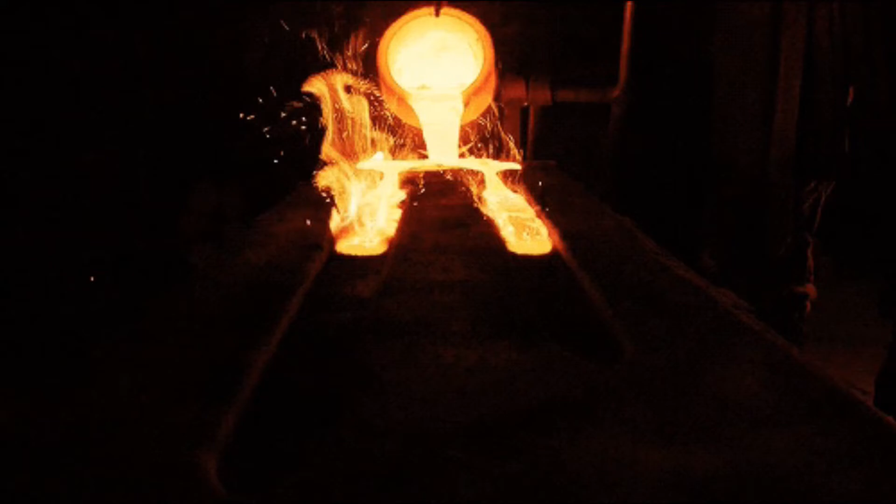Hello friends, in this video lecture we will discuss fusible plug. It is one of the mountings of the boiler.

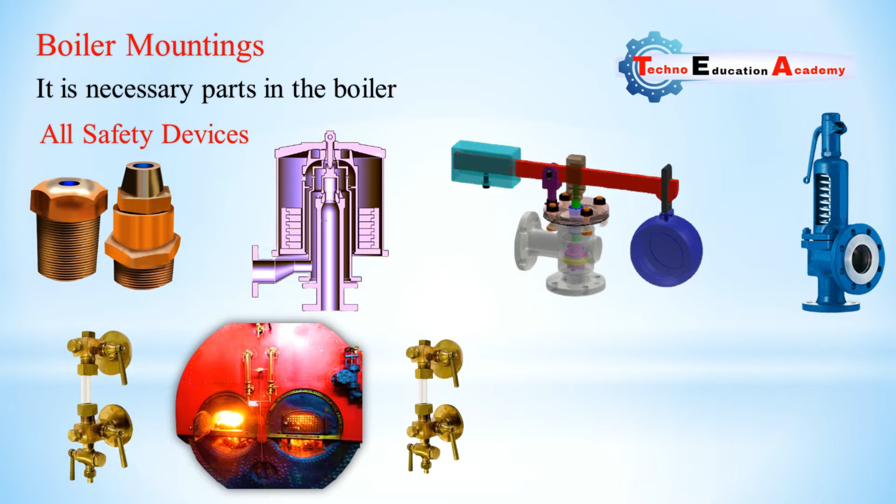First of all, what is mountings? Mountings means it is a necessary part in the boiler. Without this part we cannot operate the boiler. So various types of safety devices are attached with the boiler for safety purpose, like fusible plug, various types of safety valves, water level indicator, pressure gauge, etc. These are the mountings which are attached with the boiler for the safety purpose.

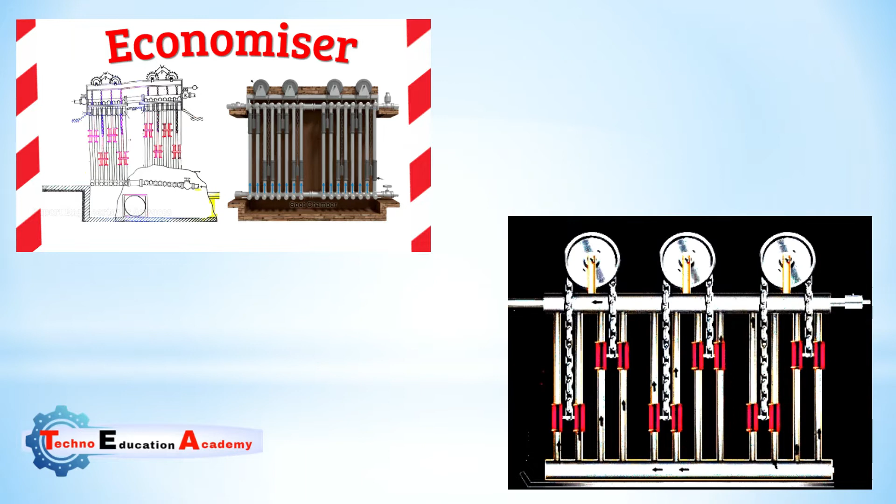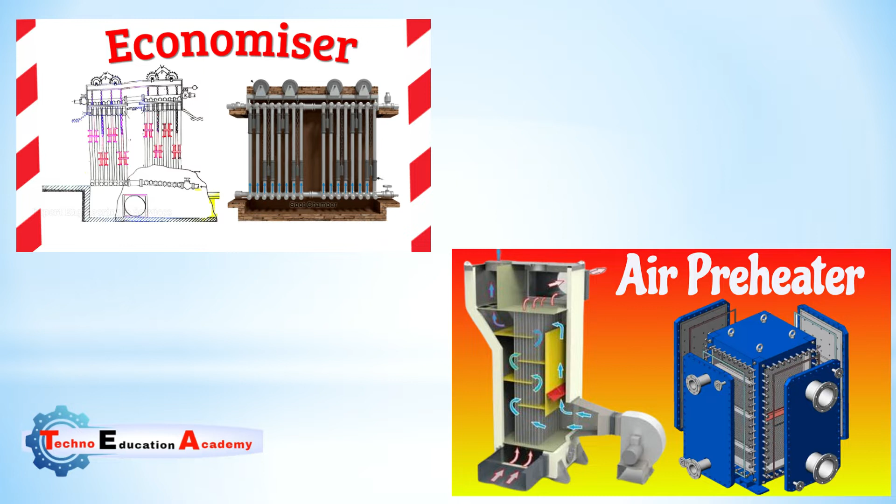Accessories means those parts in the boiler which are not compulsory, but whenever we use them, we can increase the efficiency of the boiler. In previous lecture we have already discussed economizer and air preheater, which are accessories in the boiler. They are not necessary parts, but whenever we use them, we can increase the performance of the boiler. So mounting means necessary part in the boiler, and accessories means parts that are not necessary, but whenever we use them, we can increase the performance of the boiler.

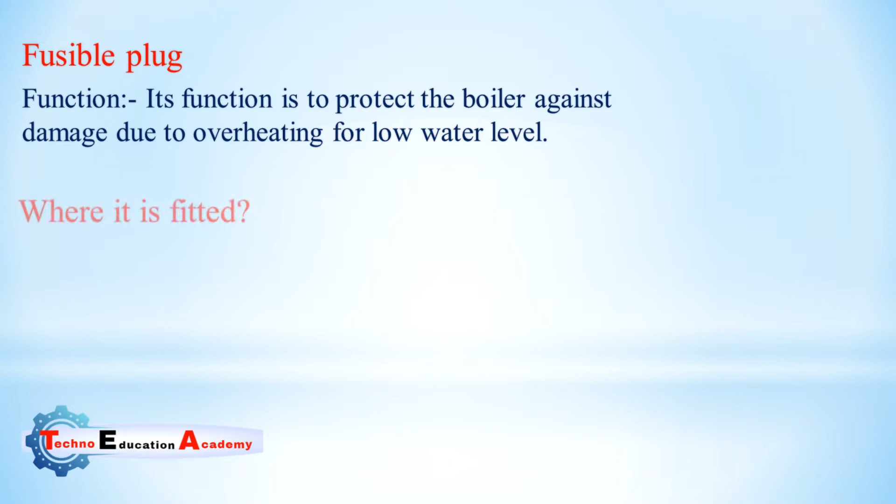So first of all, we will discuss the function of fusible plug, where it is fitted in the boiler. Then we will discuss the construction and working of the fusible plug.

The function of the fusible plug is to protect the boiler against damage due to overheating for low water level. Whenever a sufficient level of water is not there in the boiler, and we continuously supply heat, this heat is supplied to the empty tube. Due to this heating it might be possible the tubes crack or get damaged. So for that purpose we use the fusible plug in the boiler for safety purpose. It is fitted in the crown plate of the furnace or firebox at an appropriate place.

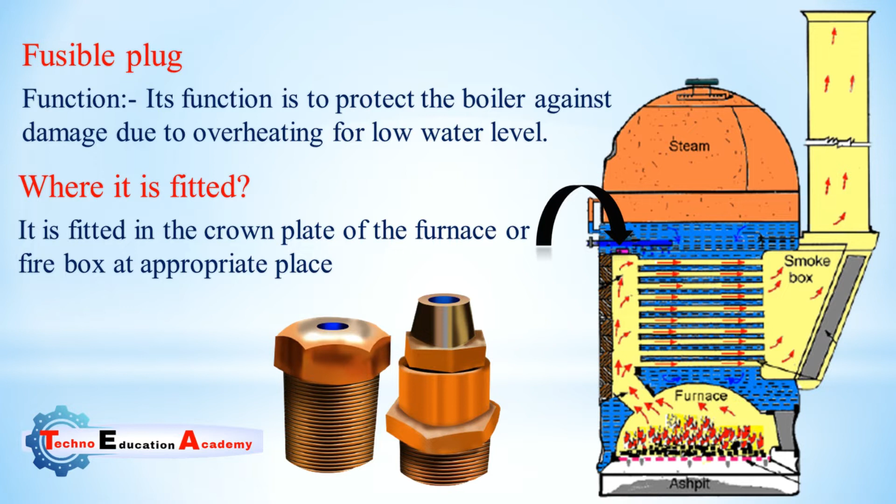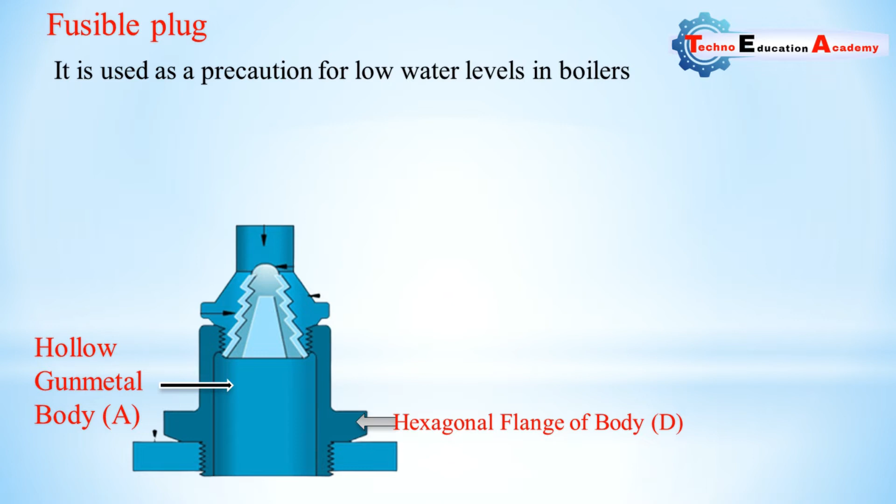Now we will discuss the construction of the fusible plug. The construction is simple. It consists of three parts. The hollow body A, having hexagonal flanges, is screwed to the firebox crown plate of the furnace at appropriate place. The gunmetal plug B is screwed to the body A.

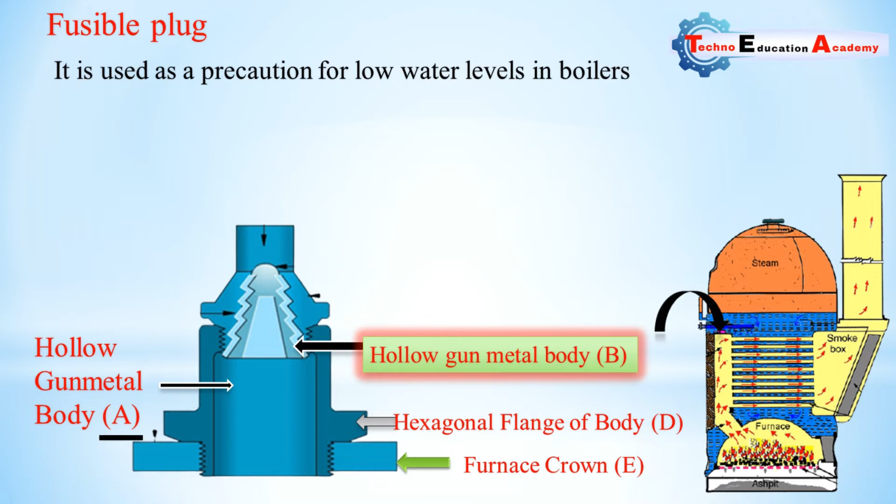The hollow gunmetal body C is made up of copper, and is located with metal like tin or lead, which has a lower melting point. The hollow gunmetal body C is fitted with another gunmetal body B. These two bodies, body B and C, are separated by an annulus of fusible metal F. Here you can see this is the fusible metal plug F.

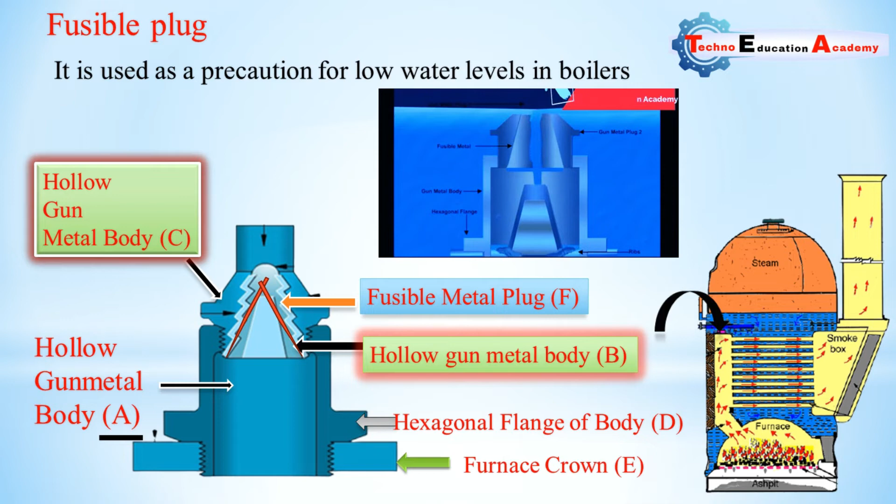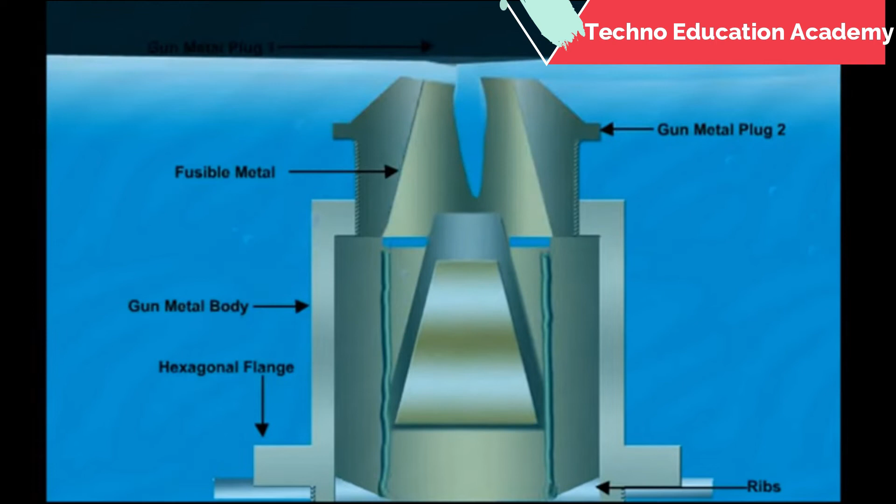In normal working condition, water covers the fusible plug, so it remains cool. In case the water level falls in the boiler, the fusible plug gets exposed to hot steam. This overheats the plug, and the fusible metal having low melting point melts quickly. Due to this, the fusible plug melts, and the opening so made allows the steam to rush into the furnace and extinguishes the fire.

Here you can see this is the location of the fusible plug in the crown plate of the furnace. Whenever the water level decreases in the boiler shell, the steam comes in contact with the fusible plug, which overheats it. As we discussed, we use low melting point material like tin and lead.

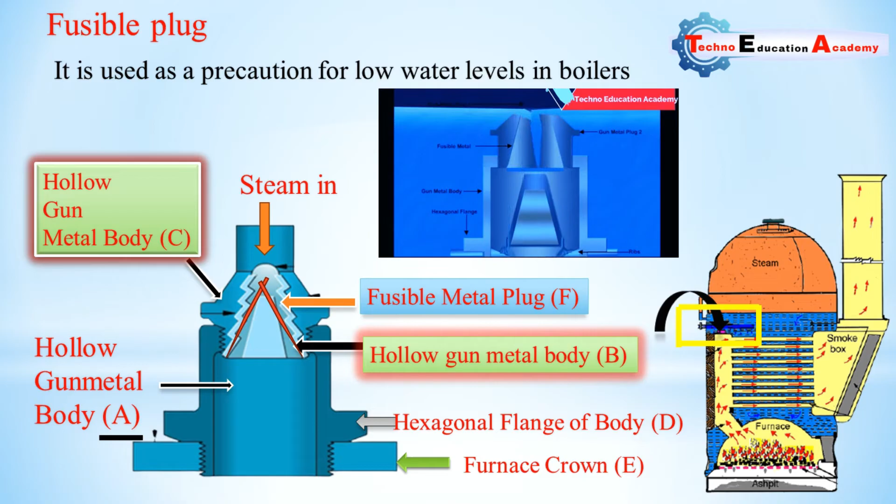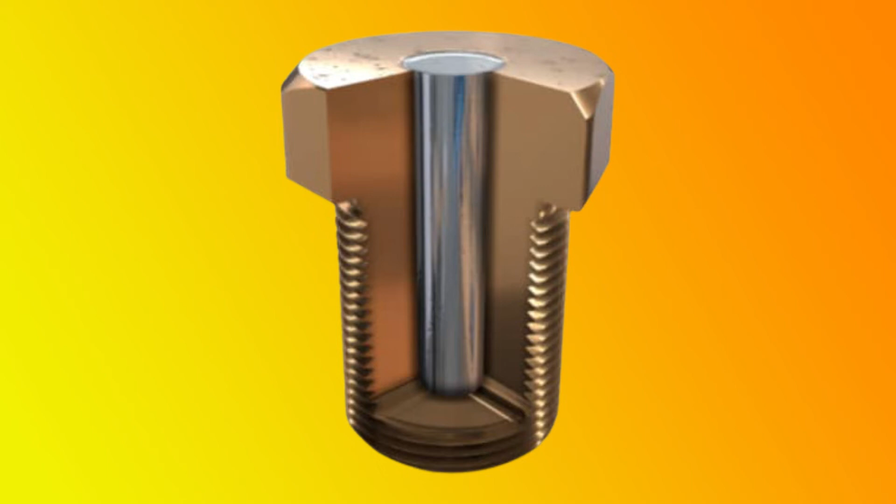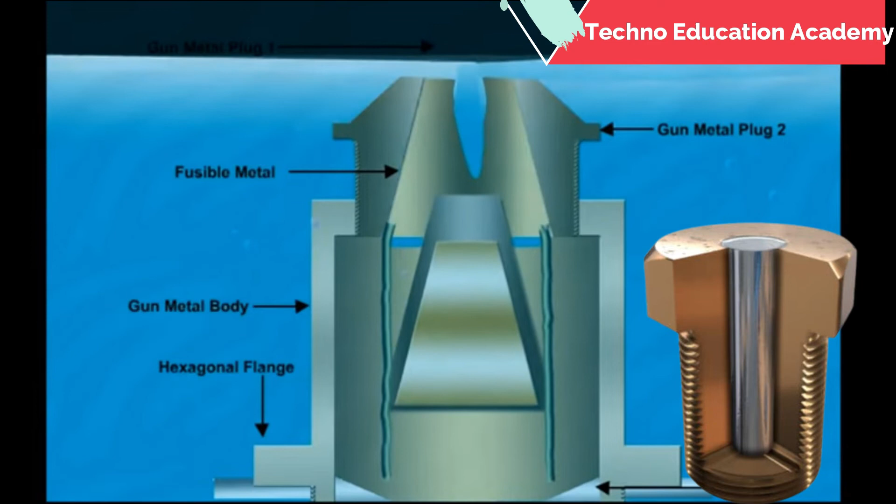So it will melt the tin and lead material, which is the material for the fusible plug. It will allow steam into the furnace, and it will stop the combustion in the boiler. So we can protect the tubes of the boiler against overheating. This is the mounting in the boiler, and without this part we cannot operate the boiler.

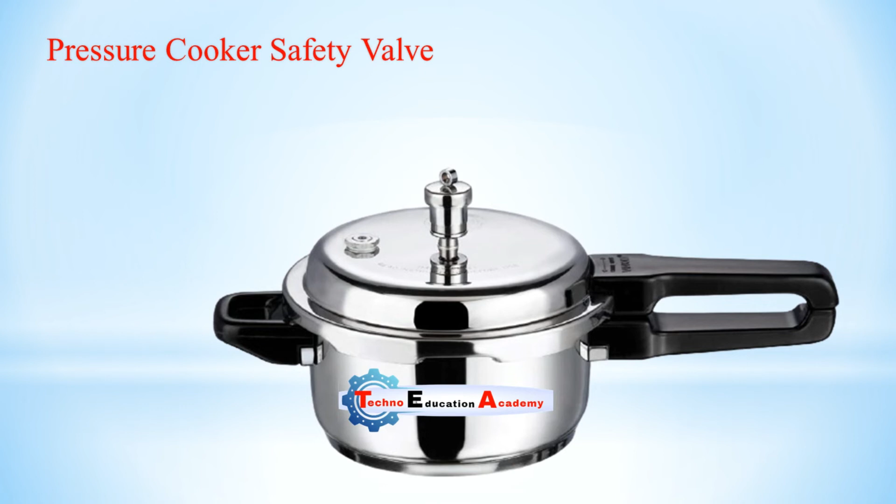This type of fusible plug is also used in pressure cookers. Here you can see this is a loaded valve, and this is a fusible plug, in hexagonal shape. It is also used in pressure cooker.

So sometimes in a pressure cooker, some impurities are there in the loaded valve, and it will not work properly. At that time, the fusible plug allows the steam to escape into the surrounding, so there is no damage in the pressure cooker, because we can release the pressure from the fusible plug.

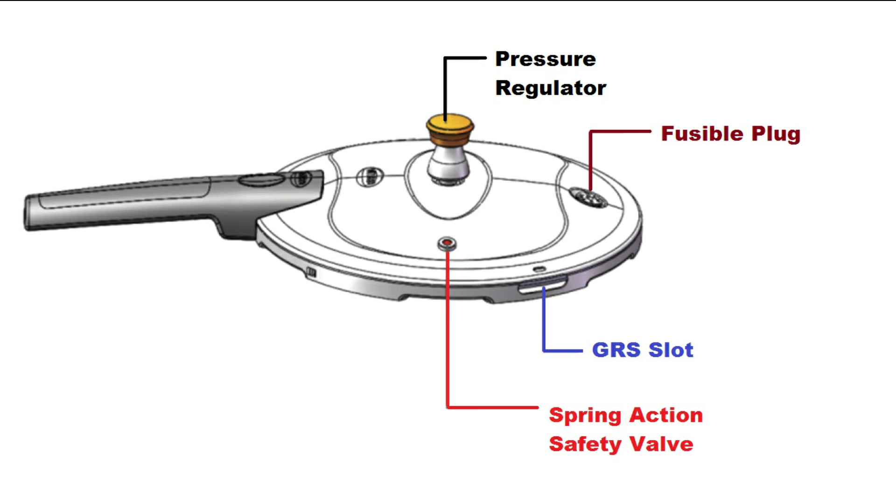Here we are also using a low melting point material like tin and lead. So whenever the main safety valve does not work properly, it will allow the steam out through the fusible plug. So it is also a necessary part in the pressure cooker.

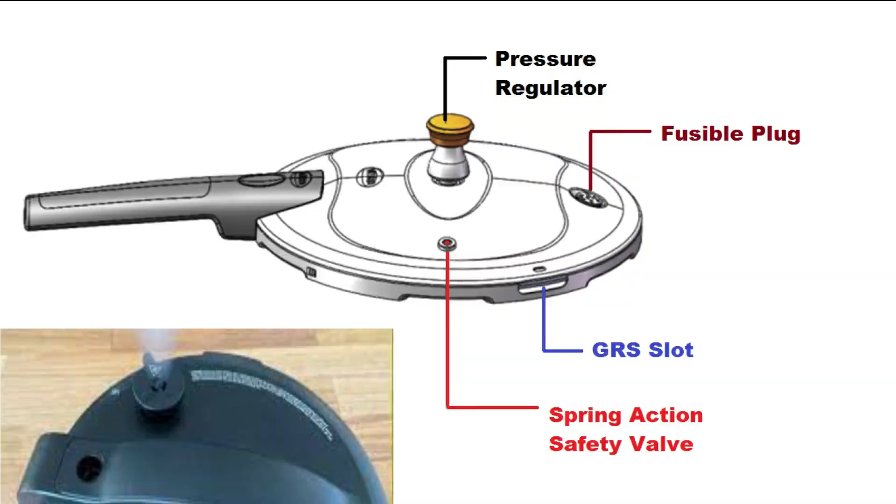But pressure cooker is not a boiler according to IBR. We have already discussed this in a previous lecture, which you can watch for more fundamentals.